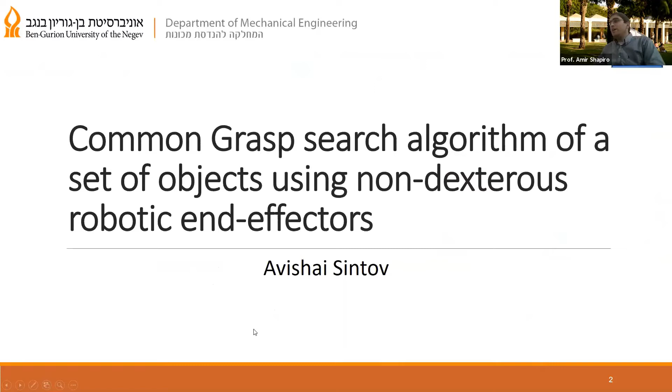So first is a project, a problem that was introduced to us by General Motors, and they have a problem. They have a manufacturing line with a lot of robots. Each robot has an end effector, something like this, that can grasp and hold a specific part in a specific place along the production line.

The problem is that if they want to produce a different model of car in the same production line, they can't, because they need to switch all these end effectors, all these robots' hands. So they asked us, how can they design robots' hands, end effectors, that can grasp several different parts with different geometries? So we came up with an algorithm that automatically mechanically designs the end effector, the robot end effector, the robot hand.

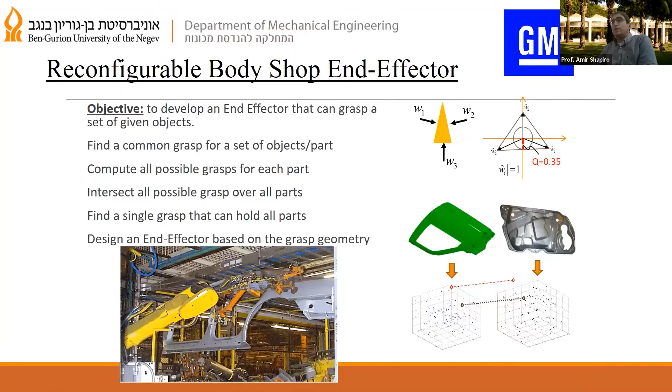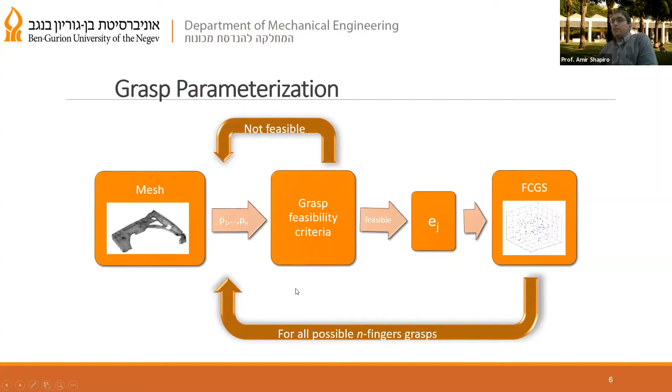So first we get a model of the part, then we search for different kinds of grasping possibilities along this part, and if it's feasible, then we parameterize it into a space of feature vectors, and if not, then we search for another possibility to grasp this part.

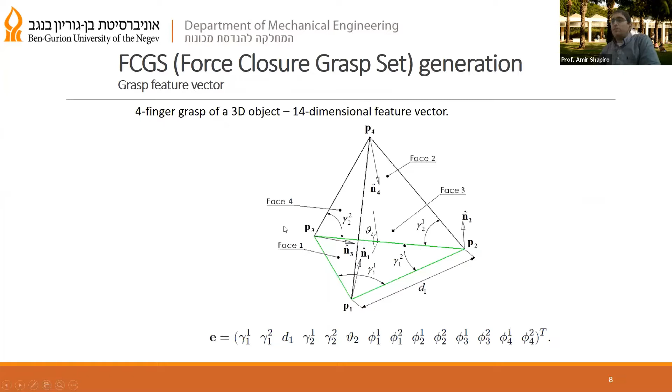The feature vector parameters are very simple. For a triangle, for instance, it's just one segment and two angles, and it can be done in 2D and 3D, and for any number of fingers or points of contact. So here you see different car doors.

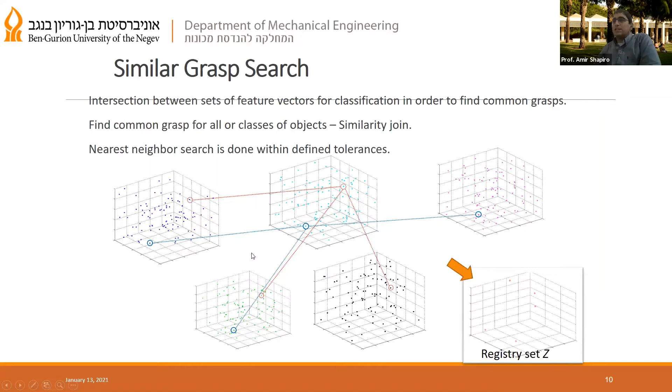We parameterize all kinds of grasps into this feature vector space, and then we find similar grasps in that space. When we find similar grasps, these are common grasps. It's the same grasp for all the parts. So you see here this same triangle along the part.

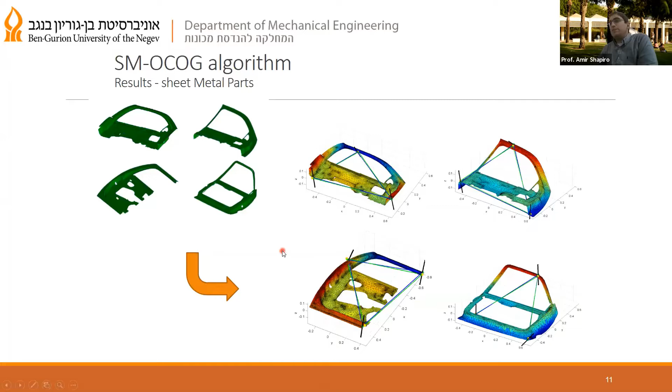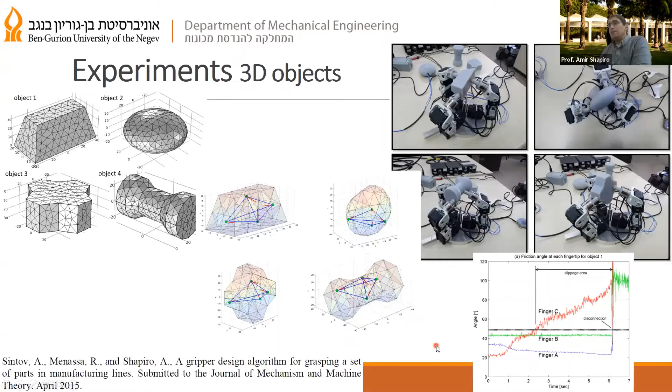Here for 3D parts, not a 2D grasp, a 3D grasp. We calculate the same grasp, and you see here the same grasp for all the parts. So it's an automatic design algorithm for a robotic hand, a robot end effector.

So when we grasp an object in our hand, sometimes we want to change the grasp in order to do something on the other side of the object. So we need to manipulate the object and hold it in a different way. But we have only one hand, we don't have two hands, and we want to switch the grasp inside our hand. So we came up with an algorithm, we called it SKIP. It is the acronym for Stochastic Kinodynamics Planning Algorithm.

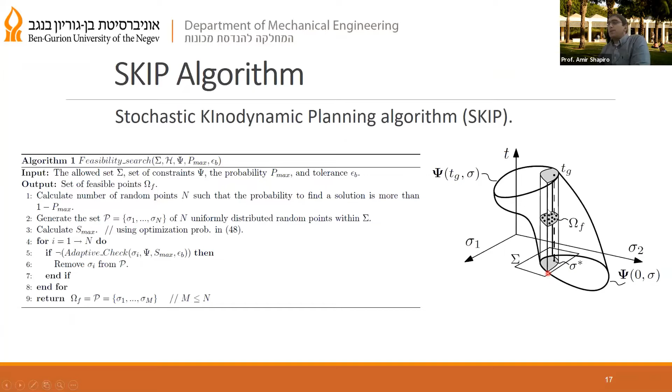And it searches for parameters for the grasp that are optimal in a sense, and can plan the motion of the robot to change grasp. And you saw here how we change the grasp of this ball. We just let it fall, and then move the arm, the hand around it and grasp it in a different orientation.

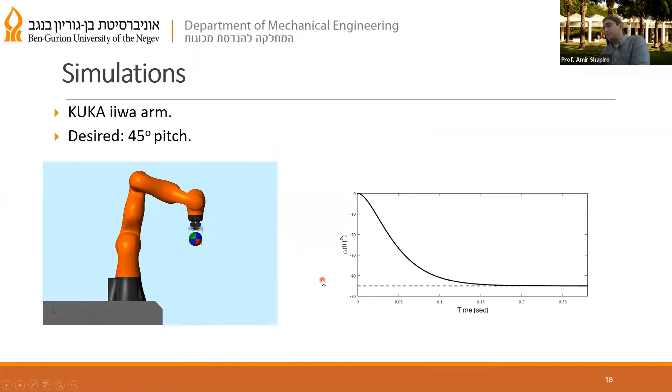We did also experiments, and this is the experimental setup. And you can see here how we just throw it, let it fall, and then grasp it in a different orientation, and then a different side of the object is open to be dealt with or machined.

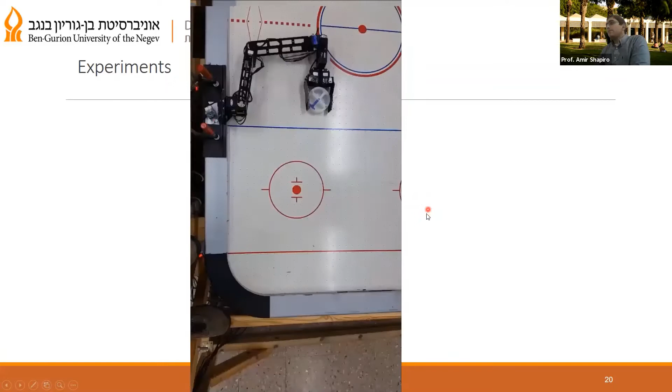And we can use this algorithm for different kinds of applications. You can see here, for planning motion between dynamic obstacles. So you can see here how the robot planned the motion around these dynamic obstacles.

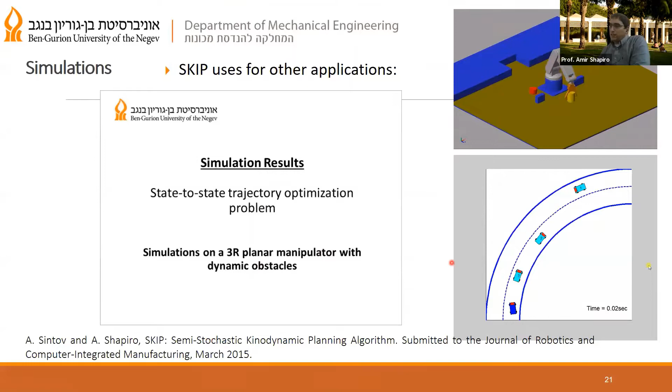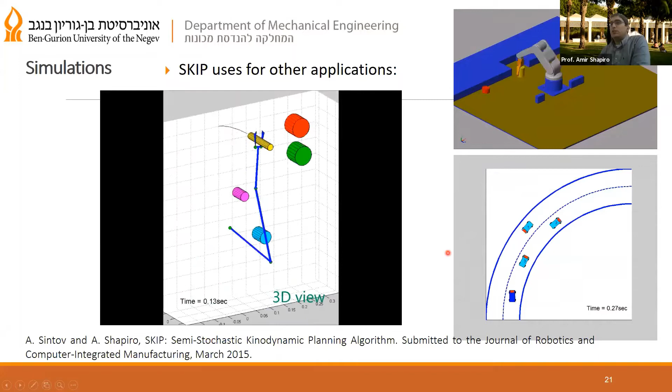And the same algorithm, exact same algorithm, can plan the motion of a car bypassing other cars. So it's a very general optimization algorithm for planning the motion of dynamical systems.

I'll move on to in-hand manipulation. Sometimes we want to manipulate things inside our hand without throwing them, without releasing our grasp, but using our hand as a joint. So we use some kind of a manipulation here. We move the hand, then brake it, and then let the object move with its inertia in our hand. And you can see here how we are doing that.

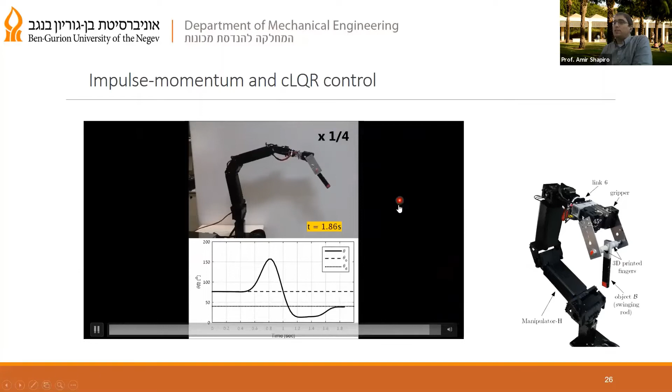So here the robot is grasping and then holding. You see, moving, then let the object move forward with its inertia, and then hold it and release it in the exact angle. And we can do it for longitudinal regrasping as well, as you can see here.

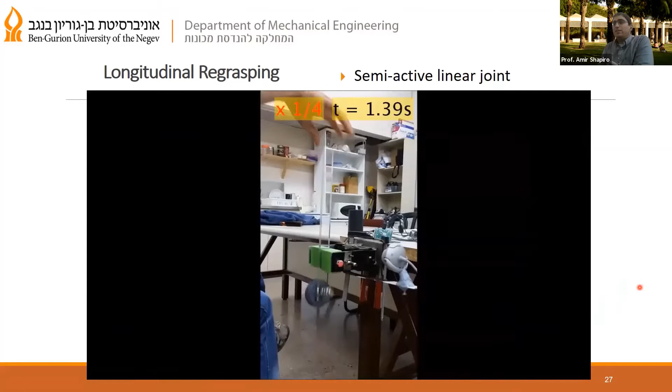In a second, so we want to move an object inside our hand, throw it up or down, as you can see here, with controlling the motion. We use here different kinds of control aspects, control laws to control this. And you can see here as well, those are not simple tasks for a robot to do, because it has to control the contact between the robot hand and the object itself as well.

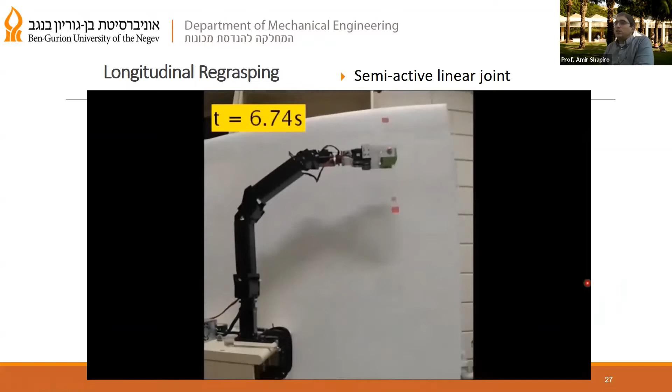I'll move forward because it's a little slow. I want to show you the experiment. So you saw the robot throwing the object up, this rod from plastic, and then let it fall down to the exact position that we want to hold it. And this is a new area in robotics that we opened that is called in-hand manipulation, and some other researchers in the world are now working on various kinds of algorithms and controllers to do that as well.

Another interesting thing that we are doing very easily is holding several items in our hand simultaneously. Like holding two balls in one hand. This, for us, is very simple, but for a robot, it's not so simple. So if we have one object, it's easy to understand where to grasp it.

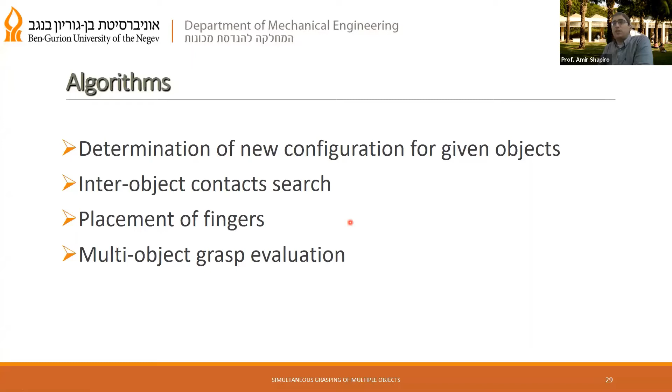But when you have several objects, you have to determine how to hold them, which configuration, which is the relative distance between them and place between them. And then you have to calculate the contacts, the contact forces between them. And then you can compute the placement of the fingers and eventually evaluate the grasp that you get and search for the optimal and best grasp. And I'll show you different examples here.

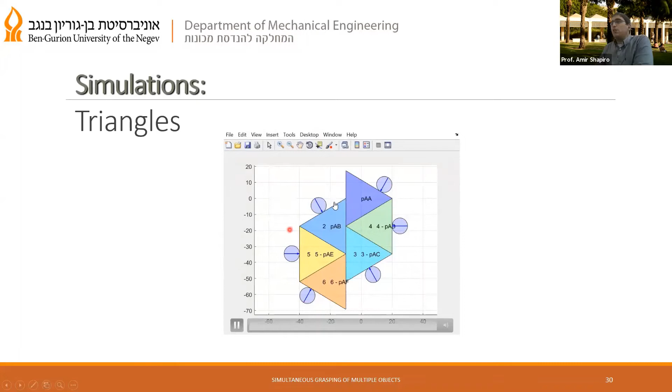So here we have several triangles, and we add more and more triangles. Then we compute the forces and the contacts between the triangles. And when we see that a triangle is not securely held, then we add a finger to this triangle to hold it secure in position. And we also compute the overall arrangement that is secured as well. And you see here the final configuration of those parts with 6 fingers holding those triangles.

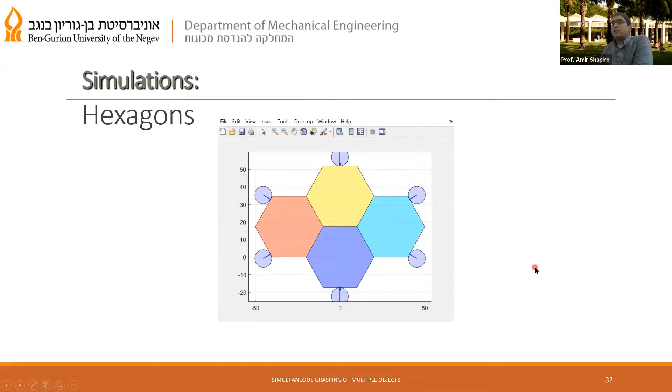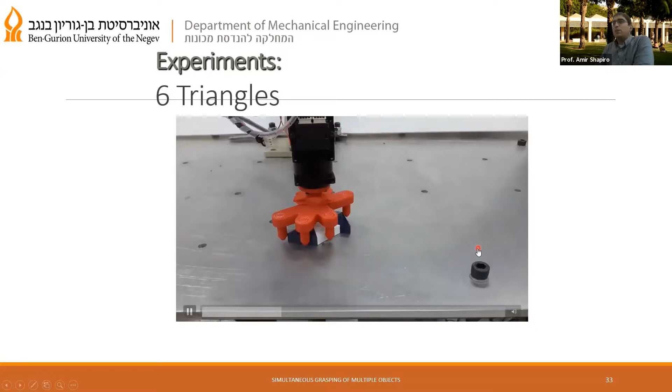And we can do this. This is very general. We do it for hexagons here. And you can see here the arrangement of the fingers around the hexagons to hold them securely. And we also built it, and we printed with 3D printers the hand and those triangles according to the design that you saw before. And you see how it can move, and all the triangles are secured in place.

Amir, 2 minutes. Okay.

And you can see it from the bottom as well. And it's moving and it's secure.

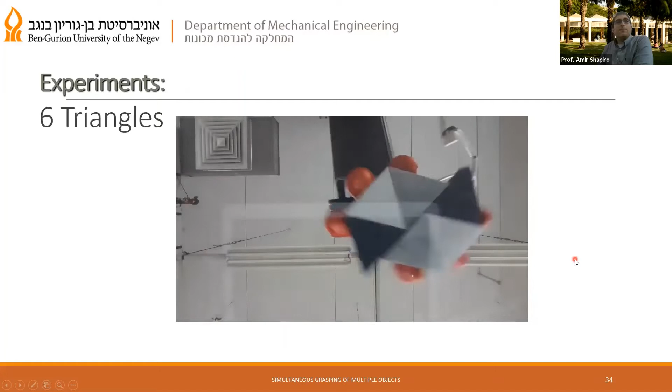Okay, the last thing that I want to talk about in the last 2 minutes is P-commerce. P-commerce is a new initiative, a new startup that we want to start. And we're working now with Oasis, the BGU accelerator, in doing this and starting the company. So this is a picking startup. We pick your e-commerce products.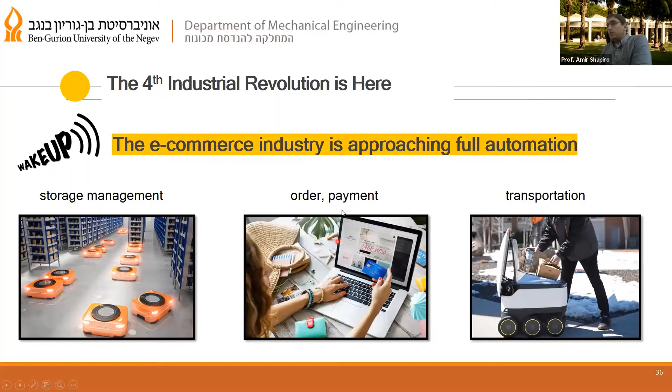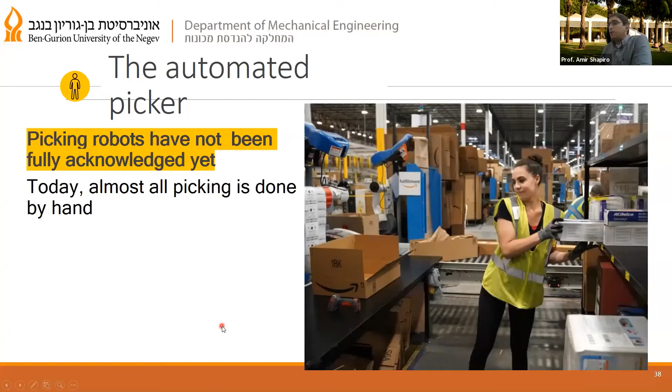And the problem is now, in the fourth industrial revolution, e-commerce is growing, and we order our stuff home, and everything is automated and we get our packages home. But how is this done? So everything is automated, except the packaging station. And you can see here, this woman is just taking an object and putting it in a shipping box. And we want to fully automate the whole supply chain.

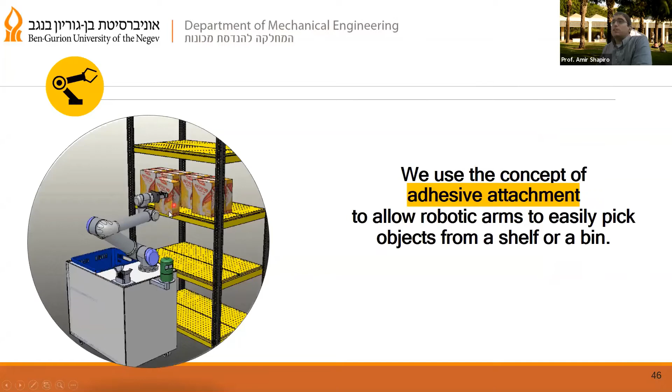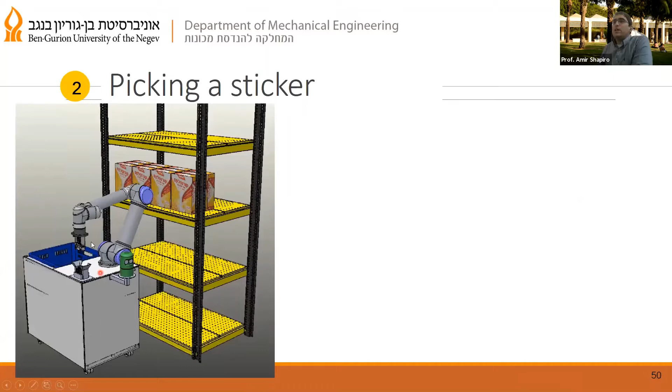The idea is very simple. It will be like a shopping cart, and the robot will go along the supermarket, and you see here, it moves here near the object that we want to take, and then it picks it.

Here you see a small sticker, then stick it to the object, and with the sticker we can take very different objects and then pick them, put them in the shipping box. The sticker stays on the box. It's a very small and sometimes even a transparent sticker, and it's written "picked by robot" on the sticker. And you can see here an example of how it works from our lab.

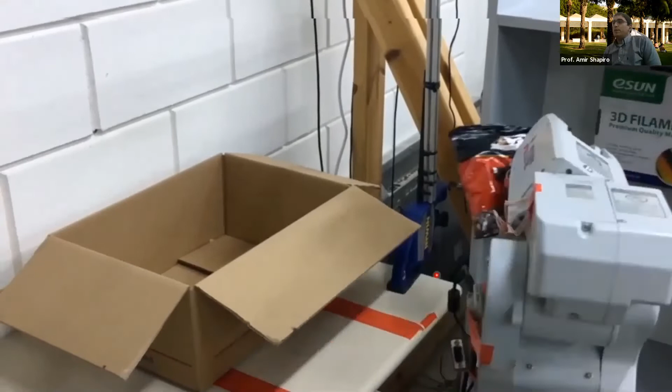So the robot picked a sticker, and then here picks a coffee bag from the shelf and puts it in the shipping box, as you can see here, and releases it. And then it takes another sticker to take another item, and eventually you'll get the shipping box into your home with the items inside, with a small sticker on each item. And that allows to automate the picking and packaging station in e-commerce warehouses.

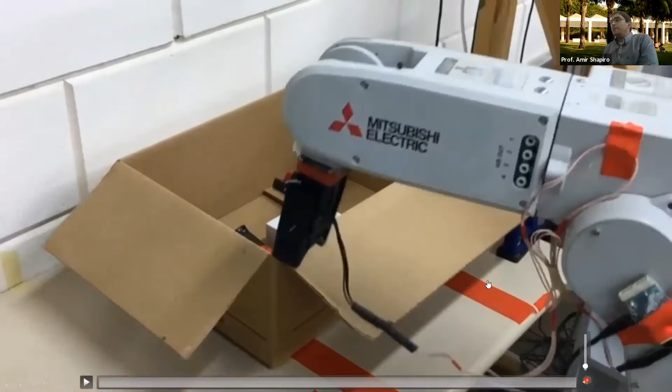Amir? Yes, this is our idea. This is our patent, and we are now in a process to commercialize it.

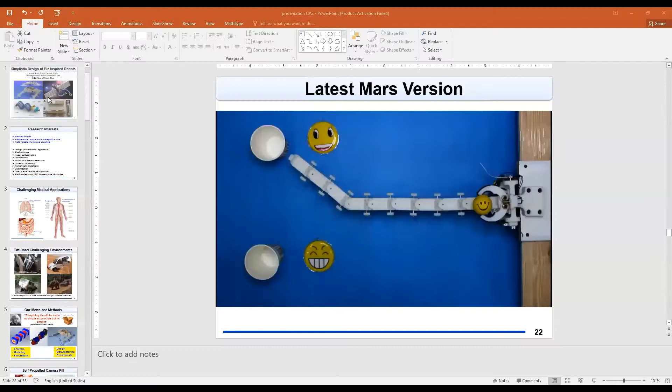So what I'm going to talk about this evening, in my time at least, is how we design simple robots which are bio-inspired. So we are going for simplistic design of bio-inspired robots for multiple purposes. So the major stuff we work on are robots for medical purposes, robots for industrial purposes, maintenance, space, and such applications, and field robots for search and rescue, for example, and other applications.

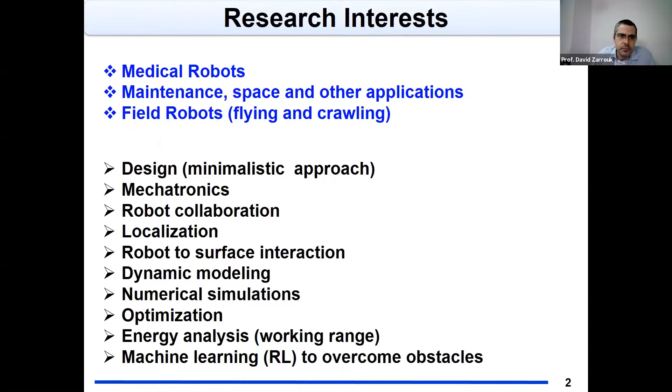So the first part, which is the medical robots, is we want to go through the body in minimally invasive ways. So the body has many areas where you can send robots through. So you have the lungs, for example, so you can have a robot crawling inside the lungs. You have the cardiovascular system, which reaches almost any point in the body. And you have the intestines. So our specific point currently is going for the intestines.

We want to develop simple robots, small enough, which can travel in the intestine. So these robots will carry a camera, for example, but it's not only a camera. So it's a self-propelled robot, which hopefully would be untethered, which means autonomous in the meaning that it's not connected to an external wire. And we want it to travel inside the body.

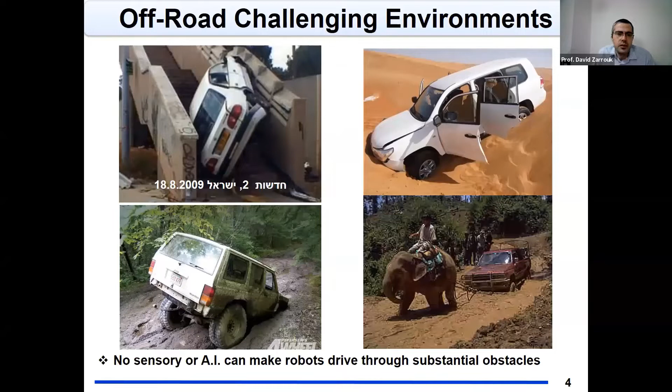Other things is we want robots to travel where wheels can't. So we work on these two problems. Actually, both the problems, the medical crawling and crawling where wheels can't perform well, are extremely similar, and we look at them in a similar manner.

So why did we choose a simplistic design? Actually, first, because it does work better. And, you know, there's a very old saying attributed to Albert Einstein, which says, everything should be made as simple as possible, but no simpler. So we need to look at the simplest possible solution, but not simpler than that. And, you know, the famous saying that we should think out of the box. So we have these two mottos, and now the question is, how do you do that?

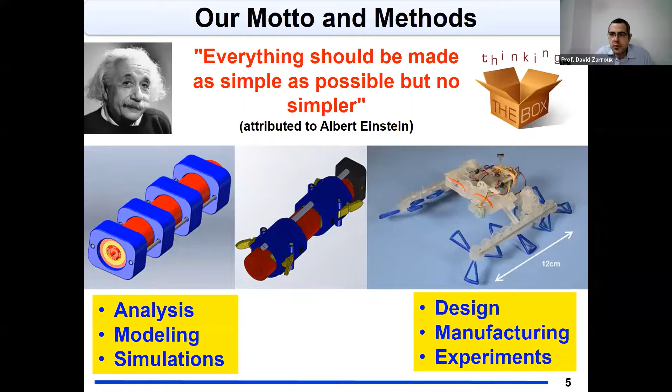So how do you find the simplest possible thing, which is not simpler than it should be? So we work very hard on this. We look into finding simple solutions and develop them and design unique robots. So in the first project I'm going to talk about here, we want to make a robot that crawls inside the intestines.

So we have two ideas. First one is making a wave-like robot, which is what you can see here in this figure, which can crawl. We hope that one day we have it small enough that it can be swallowed. And then it crawls inside the digestive system, reaches the small intestine and then the large intestine. And then you have a doctor, a physician, controlling the robot from the outside.

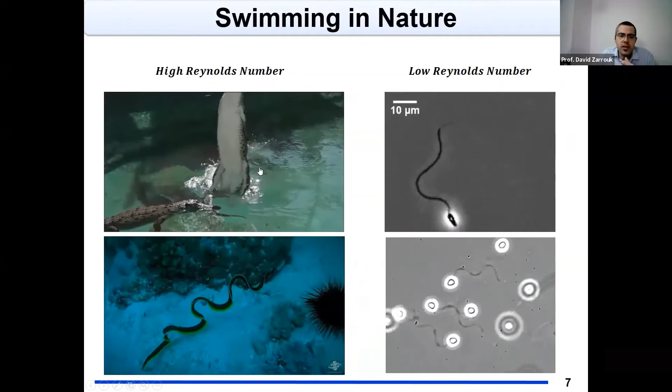One of the reasons is that, for example, if you see here, you have a wave that's produced by many motors, and we cannot make it very small. Other designs can make a wave, but not a pure wave. And these are different examples which are found in the literature. But we wanted a pure wave, something simple which can be made smaller. And we came up with this.

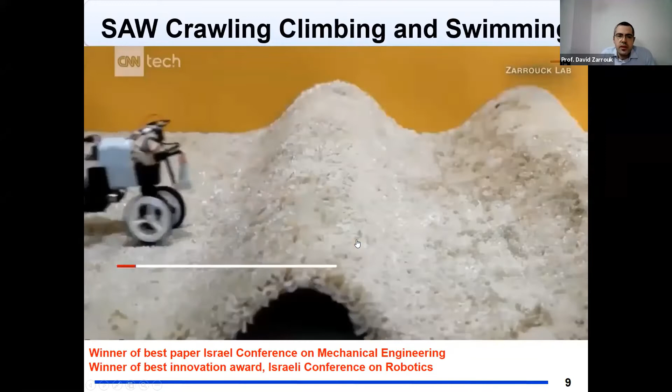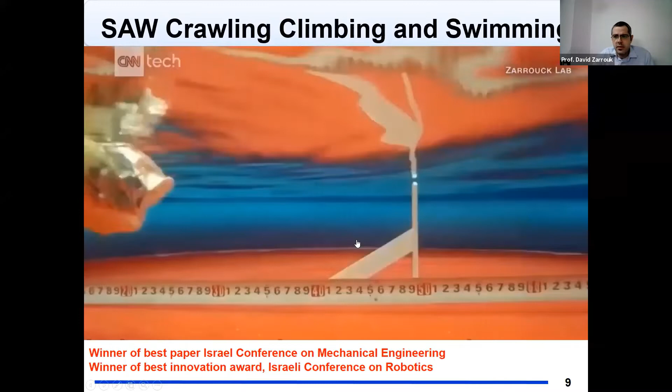So this device is pretty large. It produces a wave by rotating a helix. And as the helix rotates, it moves the links up and down, and that makes the wave. So here you can see the robot traveling vertically. It can also swim by just moving the wave. It can also crawl on different surfaces.

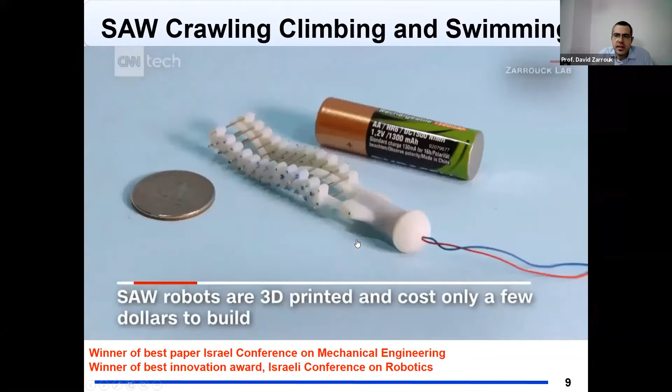As I said again, this is a pretty large demonstration, and this is a smaller one. You can see here in my fingers, and this is a very simple solution in which the helix rotates and the links move up and down. Actually, this is patented by the university. This is our patent. We invented it a few years ago, and we already received a patent in Europe and now in the States. Here you can see the design, and this thing advances.

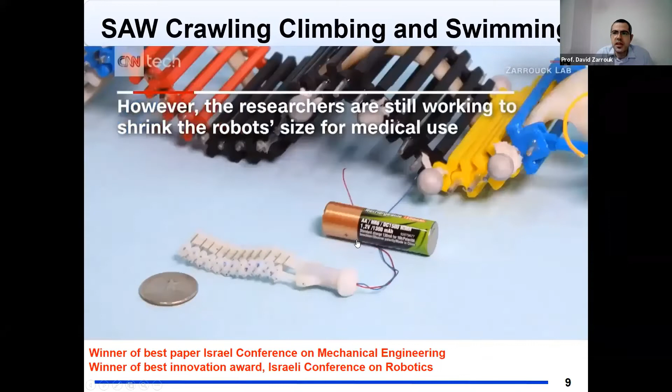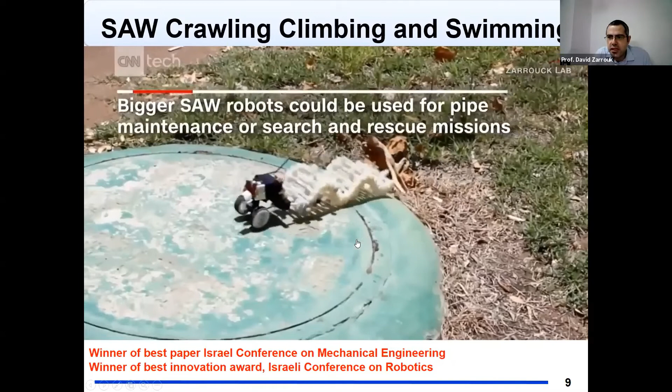So it can reach very high speeds. We reach 57 centimeters per second, which is much faster than other designs of wave robots. And it can move between different surfaces. Actually, it looks like it's magically moving, but there are physics. I'm not going to discuss how it works, but we developed the physics and explanation of how it works. Here you can see the size of the robot versus a quarter of a dollar. These are smaller designs which we developed.

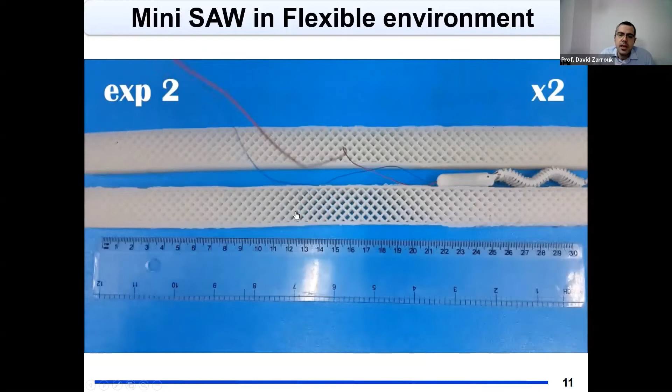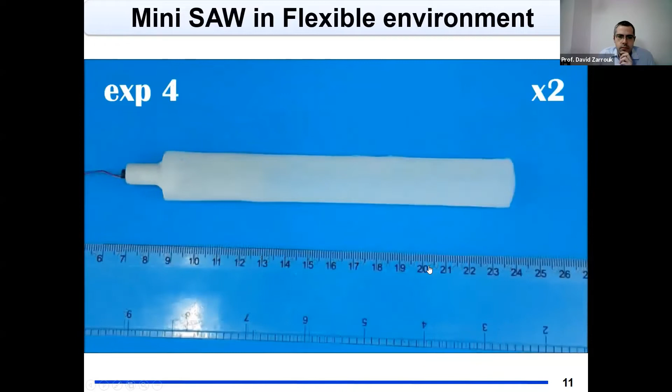And we made many experiments on how these things would travel on slippery surfaces and flexible surfaces, so not just rigid or regular terrain. This is a much smaller device, but still a bit too large. As time advanced, we managed to make things even smaller. Here you can see the device traveling in a flexible tube. This is a work that was published together with my student Lihi Drori.

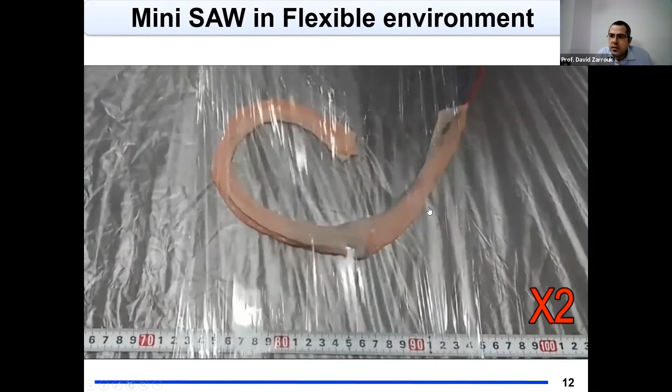And here we made first experiments inside the intestines of a pig. I'm going to skip now and show you other experiments inside the small intestines of a pig. So the device actually works inside the intestines. It advances, and it also gives the impression that it's alive for some reason. It's not, obviously. It propels itself very well, and it doesn't cause damage to the intestine. So theoretically speaking, we have first primary experiments which show that this system could be feasible.

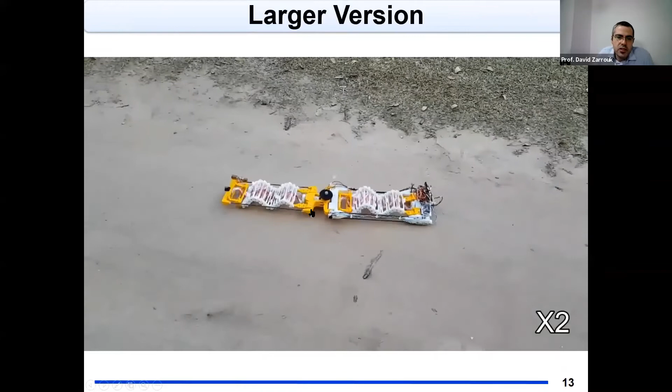We actually developed a substantially larger version of this robot, with which we can travel over terrain for search and rescue applications. You can see it's traveling over grass and so on. So this is not for medical purposes. It could be used for search and rescue and other applications. I'm going to skip this for now.

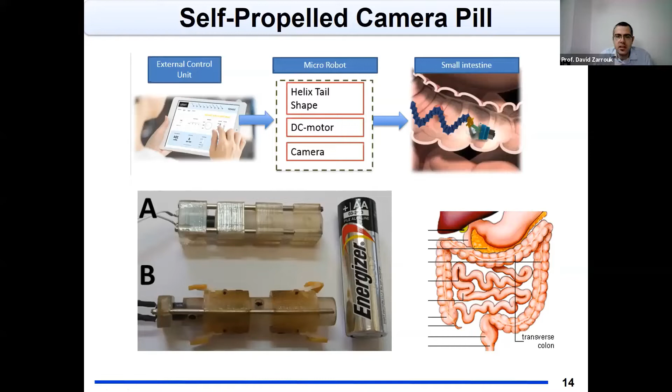A second device, which we also developed for medical applications for the same purpose, is not a wave robot but a worm robot. So here you see a couple of designs of a worm robot, next to an AA battery. The same idea is that we make a simple system, a single motor, which means we can make it even smaller. So where do you get the idea of making such robots? These robots are derived from worm locomotion. Here on the left side, I'm going to show you a small worm.

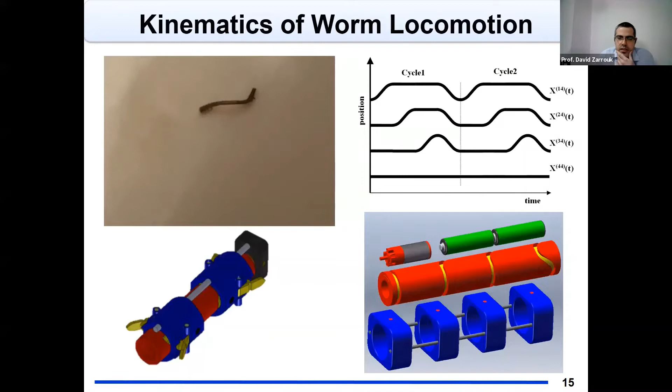Actually, I want to say this is a vicious worm, which a few months ago fell on my neck, and it bit me very badly, I must say. It's very, very small, but you know, its hooks are very strong. So until I found it and I removed it, it made all my neck very, very red.

What's interesting about it is that this worm has a very cyclic pattern of motion. So we wrote the pattern of motion, and we carved it mechanically on the design. And we came up with this design. So here we have a worm robot. This is a kind of earthworm robot, which can advance by moving each link separately. Here you can see that the shaft is rotating and making the thing move.

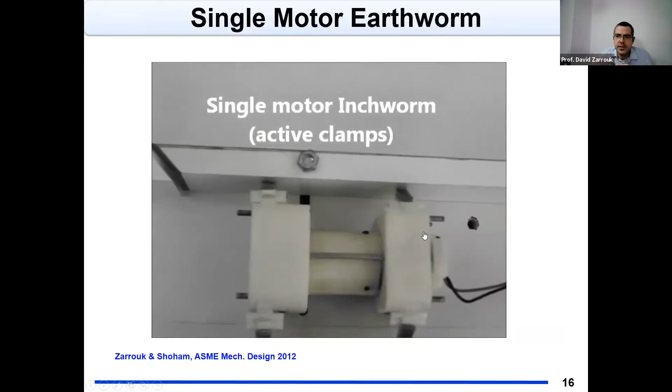Single motor. These are large designs, but this design is also advancing by actuating a single motor. So the thing rotates, and the information and the control is carved on the shaft. So this is coding vertically, you put it inside a pipe. And later, because the design is very simple, we can make it even smaller.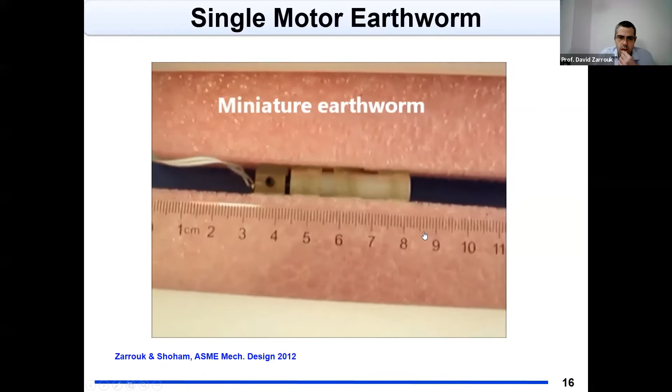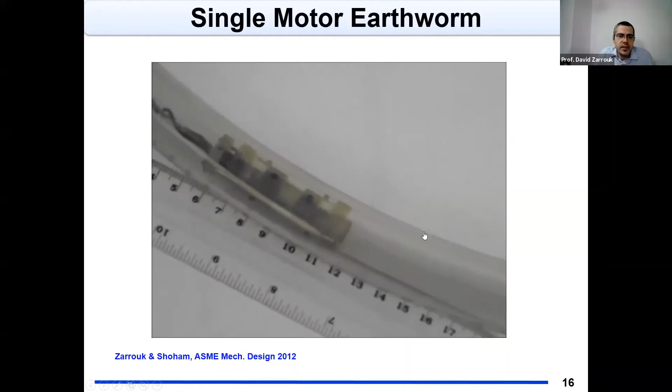And we developed a couple of designs which are more or less the size of a battery. Here you can see a very, very small design. And this is an earthworm design. You can see it's advancing also in a curved tube. So I'll advance now to the next design.

So what happens if we look at a snake? We see that snakes have a very interesting way of advancing. The body moves, and they slide somehow over the surfaces, and they move very well. We are very fascinated by their motion. And so what happens if we look at a snake and we try to add a tank to a snake, to make some combination of a snake-like tank?

So we came up with this idea. This was already in the past just a concept. Actually, it looks like the snake game, in which you turn right, left, top, bottom. Only here we have more degrees of freedom, so you can move in different ways. So we thought we can do this. Kinematically speaking, this is a very, very simple problem, but designing this was much more tricky.

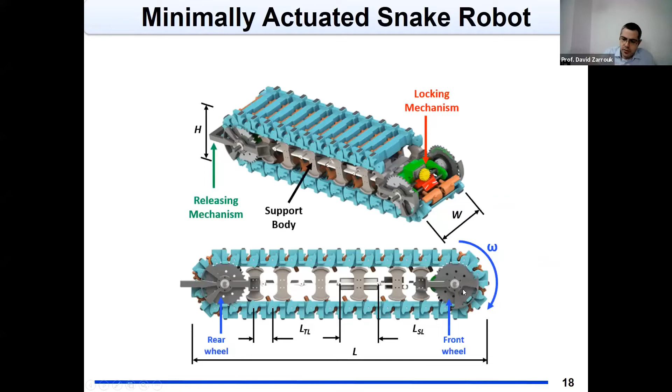So we developed this track robot, having in mind that this robot has here one motor to decide where it advances to, and another motor in the back which pushes the robot forward. So as this thing advances, we can decide if we want to go upwards or downwards. And this is the internal spine of the robot. I'm going to show you now the actual design.

This paper won the best paper award of the journal IEEE Robotics and Automation Letters for the year 2019. And here you can see how the robot is advancing in the simulation, and how the actual robot is advancing.

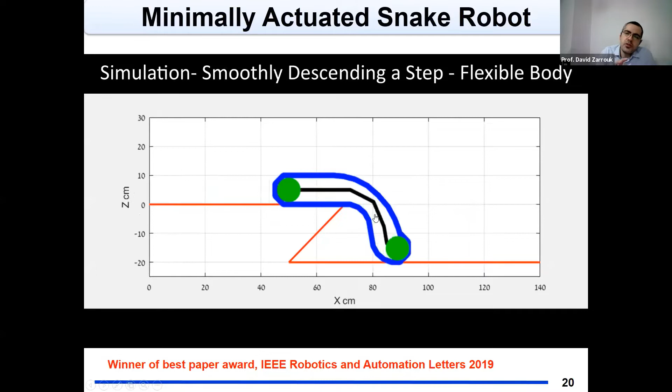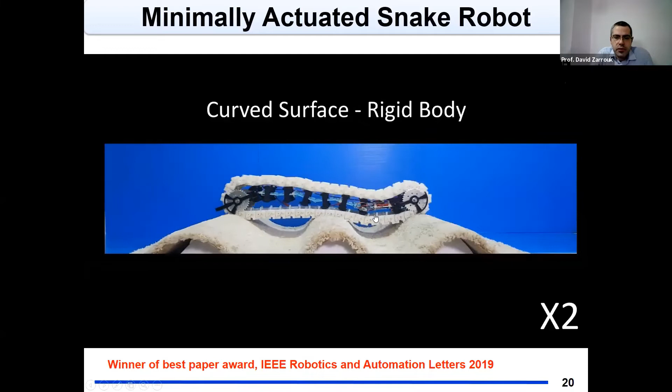So here you saw two possibilities. One of them, if you have a rigid spine track, it would fall. But with our robot, we can descend smoothly without colliding with the ground. And we can also advance. Here you see that the system is advancing over the surface while it's rigid at the bottom. And here you can see it going through the wave of the surface.

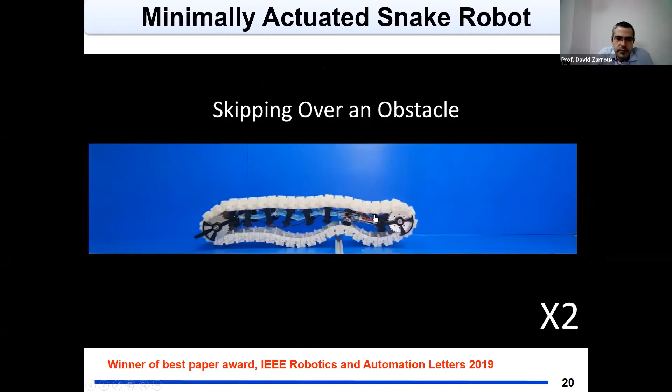Here you can see how we can avoid collisions with an object sitting on the ground. So we can simply climb on top of it. Here you can see that a regular track would fall, would not be able to advance. On the other hand, a system like ours can climb upwards and then fall to the other side and it continues. Fascinating similarity between the actual robot and the simulation.

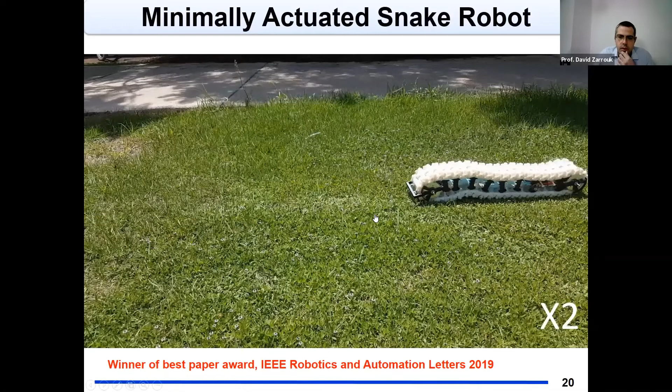David, 2 more minutes.

So in the two last minutes which I have, I'm going to show you one last example about robotic arms. Robotic arms work very, very well. And they're very, very fast. We have learned how to use them very, very well.

But I want to say that robotic arms are very well bio-inspired, in the sense that they have links and they have joints, just like we have bones and joints, and we have a hand and a gripper at the end. So we thought, okay, how about building a less traditional robotic arm?

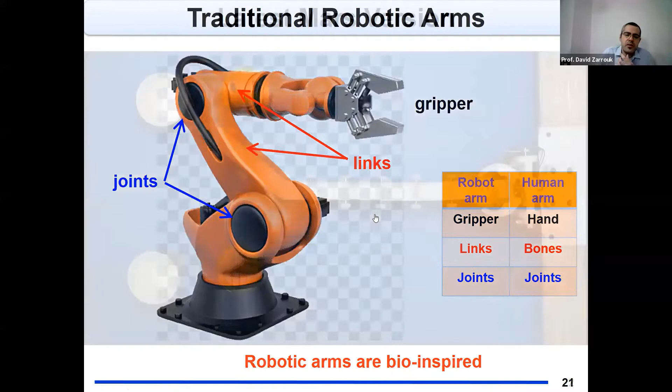So let's say instead of having a muscle or a motor on every joint, let's have one motor that advances along the joints and rotates them. So we came up with this design. It's something we also developed in our lab, and it's also patented. So we have here a motor that travels over the links and rotates them.

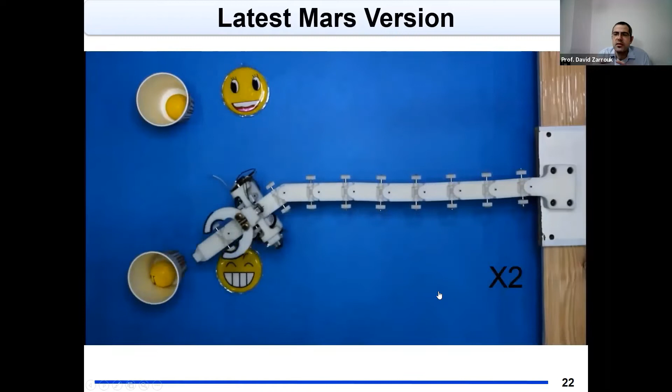So instead of having an arm and a hand, an arm and a gripper, we have a traveling gripper, which can also rotate the joint. So we have two things. This system has multiple advantages, but obviously is much slower than a regular robotic arm. It can perform the same motion, but much slower.

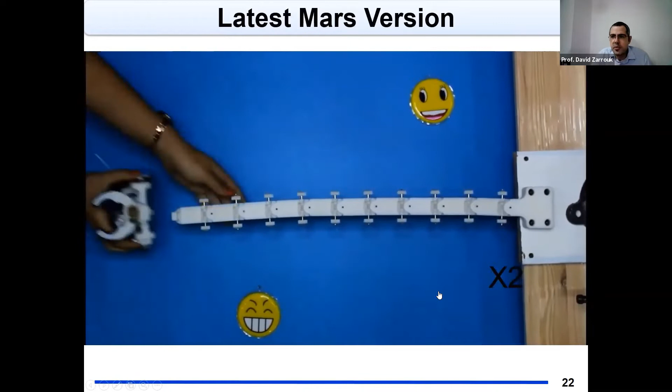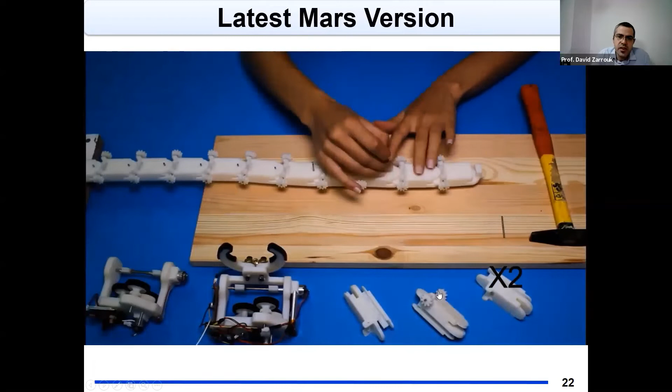On the other hand, it's much lighter than a regular robotic arm. Also, it's cheaper, and it's also reconfigurable. You can change it very, very quickly. You can remove some of the links and add other links and so on. So here you can see my student adding 4 links. It took her 30+ seconds. She was doing this fast, but it doesn't take so long to do.

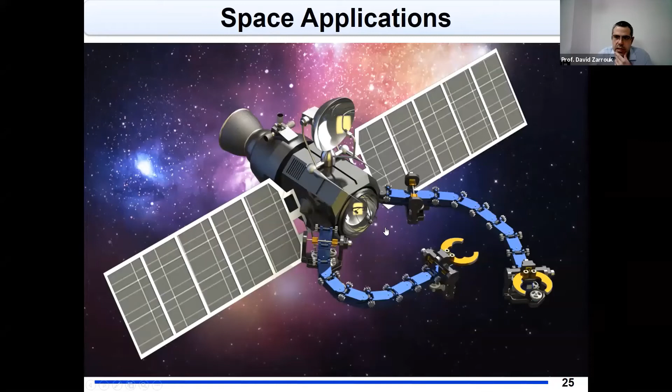And so just to say a few last words about what we saw here. We saw that making a better design and making a simple design reduces the cost of energy and makes control much, much easier, but also improves the performance. So we have better performance, less control and energy requirements by using a better mechanical design, a simple design.

To finish, actually, I don't know how much time we have, but this is a last movie, but I'm not going to run it now because we are out of time. We'll leave it for another time. How do you stop this?

Okay. I love watching those little toys. They're fantastic, really. And to think of the genius that goes into those simple little robots.